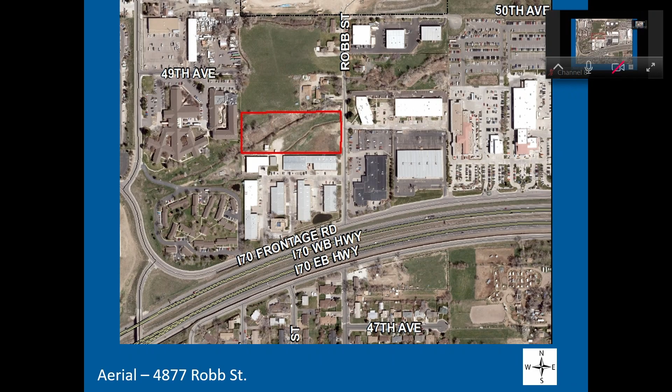The property is located on the west side of Robb Street between I-70 Frontage Road North and approximately 50th Avenue. The property consists of two unplatted parcels, which are in the process of being combined into one lot. The property measures approximately 3.5 acres and is presently vacant, unimproved land. Both the Wadsworth and Swadley ditches run through the site, with a significant grade change in the northwest corner, north of the Swadley ditch, approximately 30 feet of grade change. The Wadsworth ditch was recently piped underground in spring of 2023, and the Swadley ditch is expected to remain in an open channel.

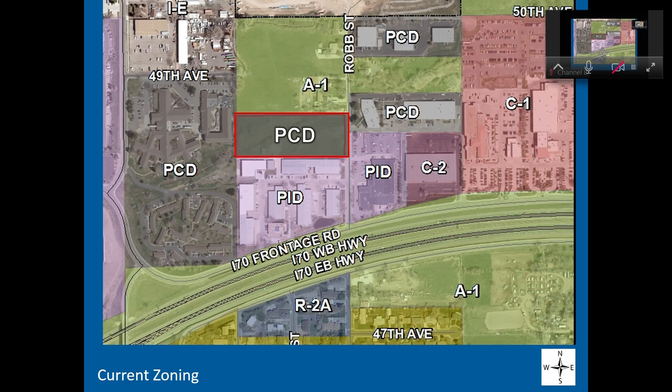The property is zoned planned commercial development. The properties to the north are zoned agricultural 1. To the south is the Wheat Ridge Industrial Park, zoned planned industrial development. To the east, properties are zoned planned industrial development, planned commercial development, and agricultural 1. To the west, properties are zoned planned commercial development and industrial employment. Most of the surrounding uses are commercial and light industrial, although the three agricultural parcels to the north do contain single unit homes.

Rezoning to a planned development in the City of Wheat Ridge involves a two-step process. The first step is the outline development plan, which for this property was approved in 2022. The second step is approval of the specific development plan, which focuses on specific details such as drainage, architecture, lot layout, building location, building orientation, and phasing. The purpose of this request is to allow for the phased development of a tree service business while preserving natural features that exist on site today. Planning Commission is the final deciding body on specific development plan approval.

The SDP for this site was actually approved by Planning Commission in October of 2023 and is back for reapproval due to the request for phasing and specifically due to the applicant's desire to utilize the site for outdoor storage and operations without the presence of a primary structure in the interim. The same SDP was approved prior with the exception of the proposed phasing.

A full analysis of the previously approved SDP, processed under case number WZ-22-07, is included in your staff report, and the analysis tonight focuses on phasing aspects of the project only. The phasing plan can be found in the SDP on sheets 9 and 10 — those are the 2 new sheets. All other sheets were previously reviewed and approved by Planning Commission.

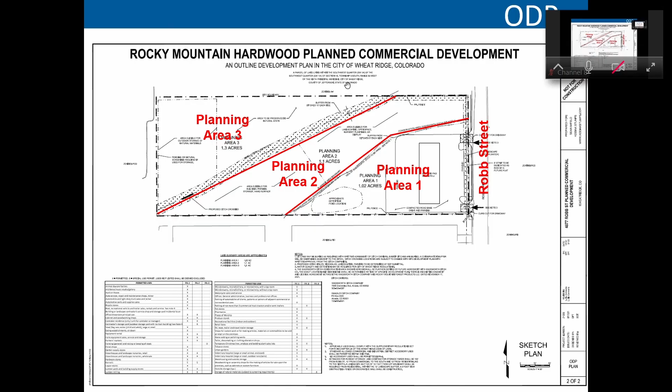As noted, the tree service business that applied for the ODP is also the applicant for this SDP, and it is an allowed use.

Initial uses include landscape material storage and outdoor uses associated with the applicant's tree service and firewood businesses, including the processing and storage of trees and wood. The retail side of the business will take place remotely in the interim phase. No clients will be entering or using the site initially.

The second phase would further include the building, additional outdoor storage, tree nursery, and display, all of which were anticipated in the zoning ODP document.

Uses in the initial phase are proposed to be accommodated primarily in the south portion of Planning Area 2 and screened by opaque fencing. One access point is proposed at the same location as the ultimate northern access point, proposed to be paved, with employee parking at the front of the lot, leading to a gravel access drive and screening of the storage and processing area, with additional employee parking on the rear side near the storage.

The initial improvements in Planning Area 1 of the ODP along Robb Street include paved access and parking, screen fencing along the perimeter, ADA accessible parking, the dumpster and trash enclosure, bike rack, interim landscaping and grading, along with construction of a majority of the public improvements, including curb, gutter, and sidewalk, street lighting, and detention. The applicant is requesting to defer utility connections to the second phase because they are not needed absent the building.

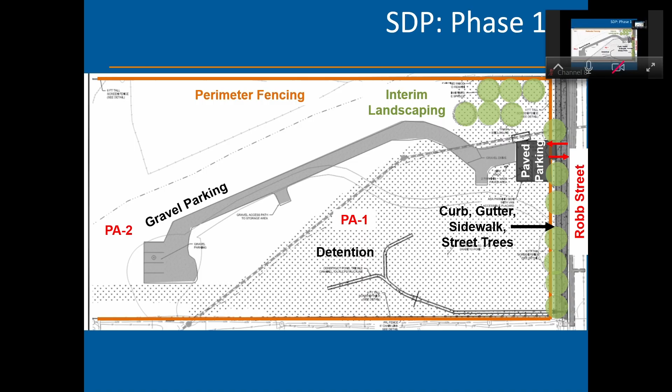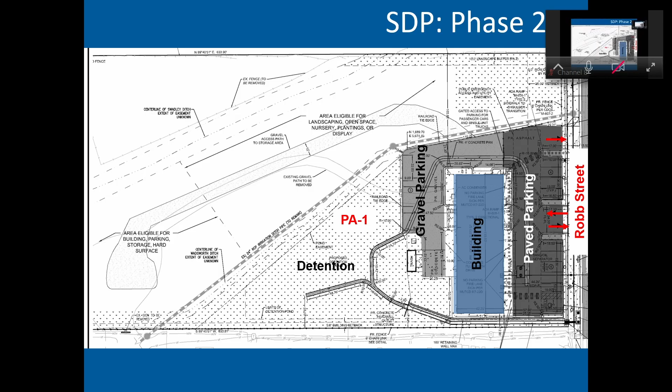Here is the SDP showing Planning Area 1 along Robb Street at ultimate build out, just to remind you what that looks like. So by 2030, it would include that office, warehouse, retail building oriented along Robb, 2 points of access, a full parking lot with 12 spaces, and then the gravel drives to the rear as is proposed today. And then the ultimate landscape plan, just to remind you what all is going in there. It will be additional shrubs and plantings to buffer things more fully against the sides once there's more intensive uses out there.

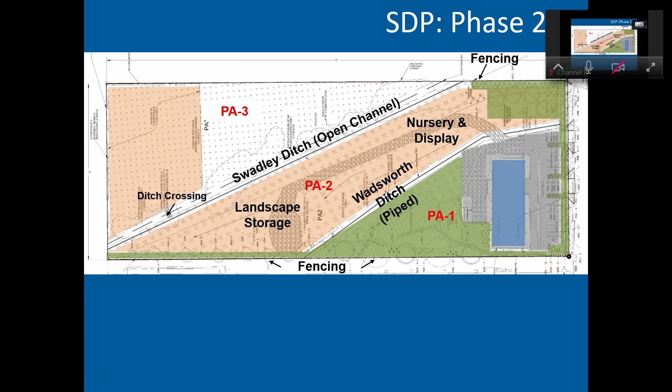Since Wheat Ridge is served by special districts, we sent the application on referral to outside agencies as well as completed an internal review. We did not receive objections from outside agencies, and coordination with these districts is ongoing. Before the hearing, the property was posted for 15 days and letters were sent to property owners and tenants within a 1,000-foot radius. The project was posted to Wheat Ridge Speaks. No comments were received in advance of the hearing.

Staff finds that the phasing still achieves the ultimate goals, and the SDP is consistent with the intent and purpose of the planned development. The SDP is consistent with the ODP, zoning document, and city code. All agencies can serve the property. Ultimately, staff is recommending approval with conditions as listed in the staff report. That concludes my presentation.

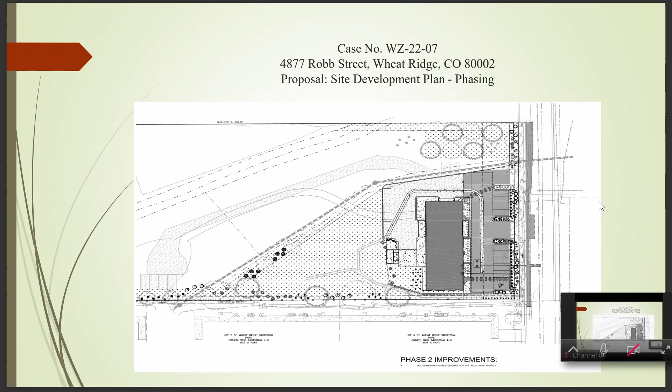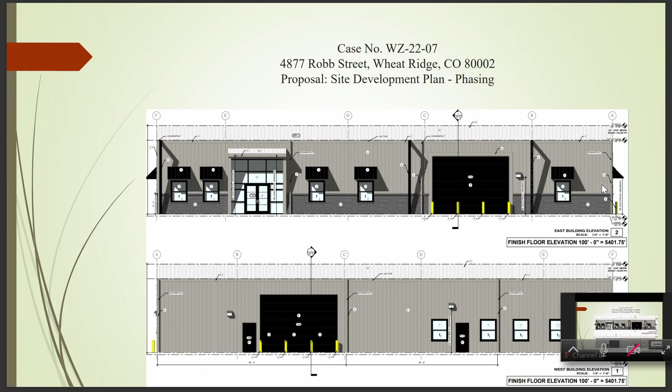Actually, the next, is there another one? There we go. The second phase will complete the balance of all the remaining SDP improvements that the Planning Commission approved in 2023. Most importantly, this will include the construction and completion of the office warehouse building. These are two elevation depictions of the office warehouse building, a side view. It will also include the associated parking and the remaining landscaping.

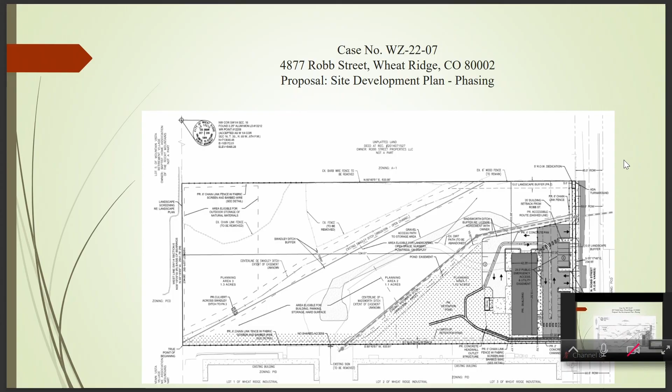The phase two improvement deadline for completion is December 31st of 2030. We appreciate your time tonight, as well as the cooperation staff has provided. Allowing this phasing will ensure our ability to build out the plan effectively and successfully. We're available to answer any questions you have. Thank you.

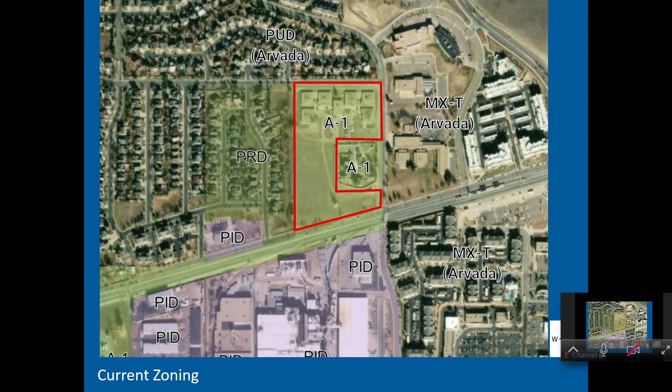While governmental facilities are permitted under the current agricultural zoning, the existing group homes do not conform to the development standards since they were built prior to the adoption of the city's zoning ordinance. Due to the long-standing vacancies of these buildings, they are degrading to the point where it's causing a threat to the health, safety, and welfare of the neighborhood and community. Rezoning of the site is necessary to bring it into conformance with our zoning and facilitate redevelopment that improves the overall quality of life in this area.

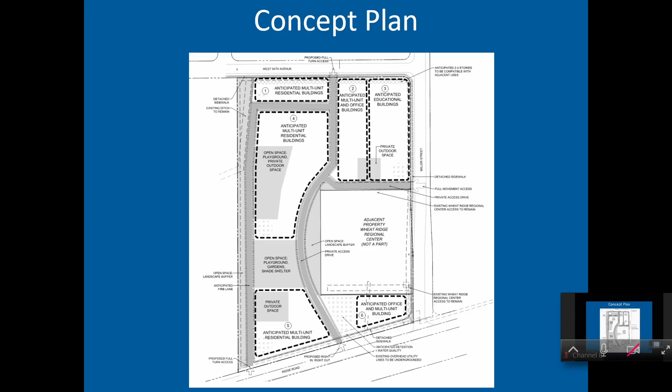And it also encourages adequate setbacks from nearby residential. So for example, on the side of the site, while it's a 0-foot setback requirement that you see, there's actually a drainage buffer to the west and a drive aisle, so it would land 60 to 160 feet from the property line on that west side.

So it also encourages those adequate setbacks from nearby residential and supports design oriented to activate surrounding streets while expanding the Red Rocks Community College campus and introduces potential for community services.

As a requirement of the zone change process, a neighborhood meeting was held on August 20th, 2025, with 41 people in attendance from the neighborhood, and those notes are included in your staff report. Since Wheat Ridge is served by special districts, we sent the application on referral to service agencies, as well as completed an internal review. We did not receive concerns or objections from internal departments or agencies.

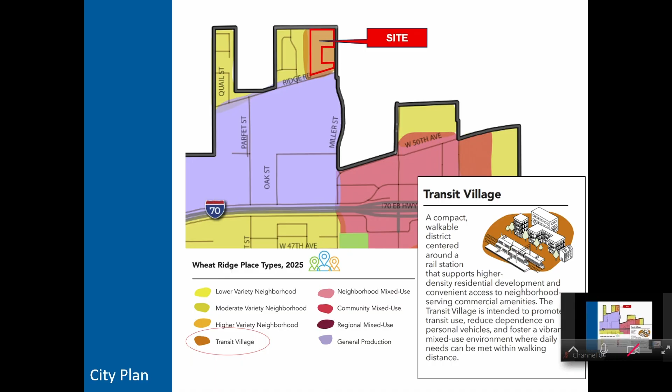The proposed zone change directly responds to the goals identified in the affordable housing strategy as well as the city plan. So ultimately, staff is recommending approval of the request.

The proposed zoning contributes to housing needs of the community, supports a mix of housing and services near transit, provides a unique and context-sensitive design that takes into consideration surrounding area and uses, improves public and utility infrastructure by upgrading utilities, and advances public improvements which are significant along the roadways. The proposed zoning complies with safety and access requirements of the fire districts and servicing requirements of utility districts. The development will likely add value to the area through high-quality design and redevelopment of a vacant, underutilized site and is consistent with the goals and objectives of plans and policies.

Planning Commission will recommend a decision to City Council, who will be the final reviewer of the request. And if City Council approves, then the zone change is approved. That concludes my presentation, and the applicant is here as well. Thanks.

Thank you, Stephanie. As usual, great job. Thanks. And the applicant.

Good evening, Mr. Chair, Commissioners. Thank you very much for this opportunity to address you. My name is Marcus Pochner. I apologize, I have a cold tonight, so I'm going to work through it. I'm honored to present to all of you. I'm a land use and community outreach consultant on behalf of Foothills Regional Housing.

I also want to echo your comment. That was a wonderful staff presentation, and we have had a great relationship with both Stephanie and Jana throughout this process and throughout our neighborhood integration.

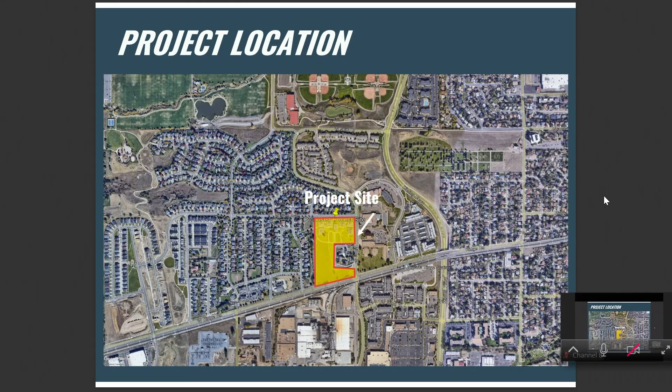Next slide. This is the project location, which you've all heard about. The capital C here marks the site. One thing you'll note in this context is just how different it is on almost every edge. It's a terrific property with the opportunity to be a buffer transitioning to single family, embracing both transit and educational opportunities that surround the site.

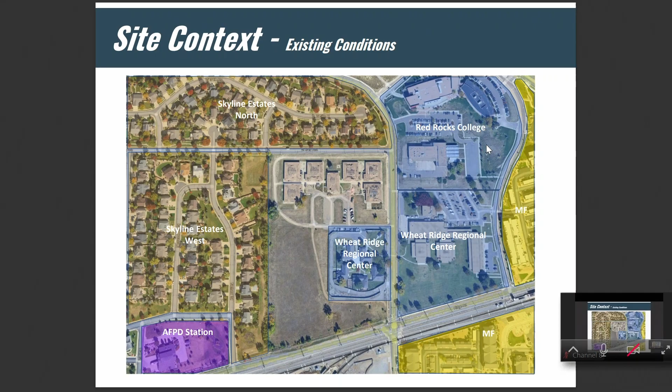We always look at the guiding documents and community feedback. Those are the foundation of how we do our planning. So we're going to talk briefly about each of those elements.

Of course, you know your comprehensive plan and your code, the guidance that we have received. We spent a lot of time looking at what the plan has here to move this project forward. We started first with that existing context.

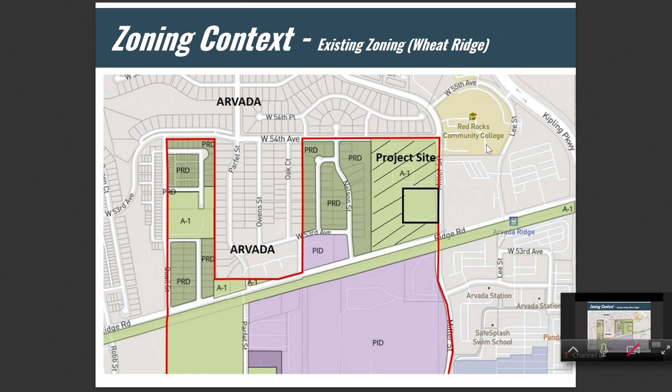It's important to know both the Arvada and Wheat Ridge zoning to really show the context. That project site has always been a state facility, so frankly, we're zoning it for the first time in a municipal district and bringing that forward to the community.

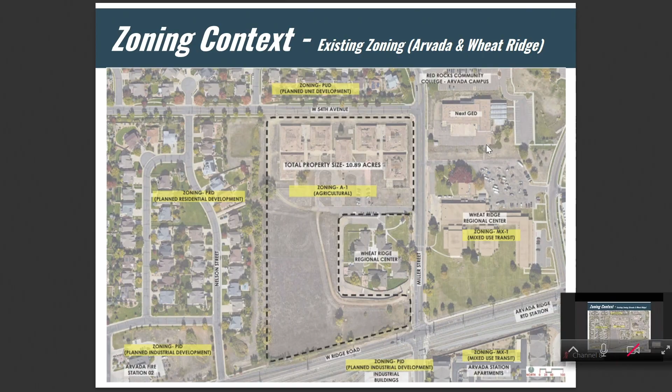This is the Arvada and Wheat Ridge zoning. You see that transition from the Arvada station apartments, all mixed use, all TOD. We become the transition and buffer site that then transitions away from Red Rocks and into the single family neighborhood.

As was noted by Stephanie, we're at the top of the map, a transit village. A village is exactly what we want to bring forward, as you see next. That image really shows the type of transit-oriented development that is very walkable, scaled, gentle density that comes across the site and meets the neighborhood where it is at today.

Our proposed zoning, we are requesting MUC TOD. That is our request because it is in full consistency with your underlying plan. We are on a commercial corridor and we are bringing forward these residential units that were designed and envisioned along a transit line.

We are being very clear with the community. We are not pursuing the maximum density or height on this site because we want to have that transition. This is approximately 200 units that will be built across the site and a substantial expansion for the Red Rocks Community College for that nursing program.

Our community outreach, the second part of that foundation, we use something called concentric outreach philosophy, where we work with the most adjacent neighbors and go out from there. So we did 3 voluntary meetings before we had the city meeting because we think it is so imperative to hear from them and integrate their comments into our plan.

We have met with 150 plus people. We have had about 15 follow-ups. We continue to engage with them and will as we move through the site plan process.

This shows our philosophy of how we do it. We actually break up the neighborhood because the issues, as you see on the focus group to the north or the west, are very different. How you address the site on 54th, how you live on the west with the homes actually facing west with a natural area behind them.

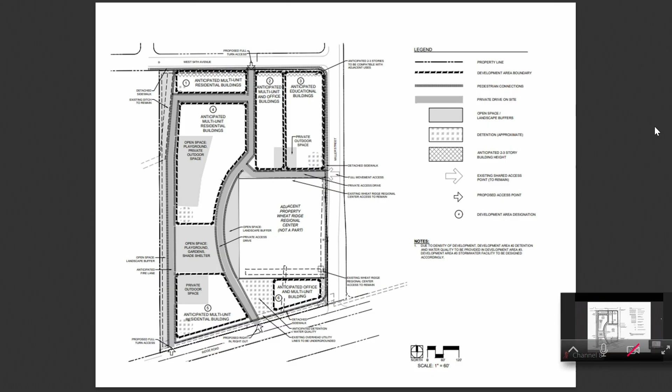So really embracing them there. There's a green space there, Red Rocks pulling across Miller Street, where there's that natural connection to them. They'll be able to walk across, park there, really utilize that facility. And then with a substantial setback onto our western neighbors, that's where, as we go south, having a little more density, honoring the setback from that Wheat Ridge facility that will stay in place, the state facility there, and really creating a complete community that doesn't have much height, 2 to 4 stories, and appropriate density for the entire neighborhood.

This probably says everything. We have senior housing, family housing, the community college expansion, those lower heights, and we're building into the density. This site slopes so far to the south, we really get the opportunity that 4 stories, the site falls off so much you're able to build into that.

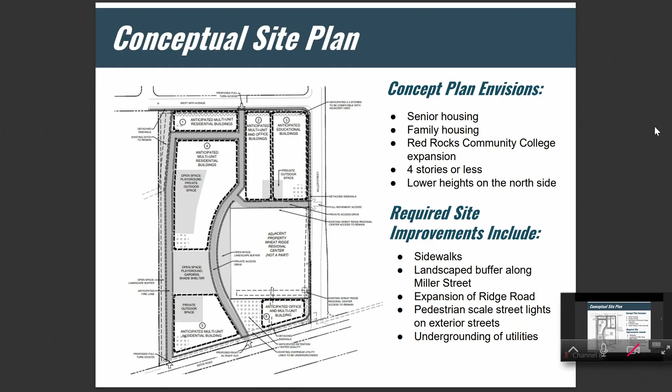Probably as important in that village image that we're all thinking of is this needs improvements. It needs infrastructure. It needs to be knitted into the fabric of the community. It's an unfinished site that you go by today and wonder what happened there. We will bring it in with pedestrian and roadway connections, and really make it part of the existing community.

So we're honored to present this. We look forward to any questions or comments that you have. Thank you very much.